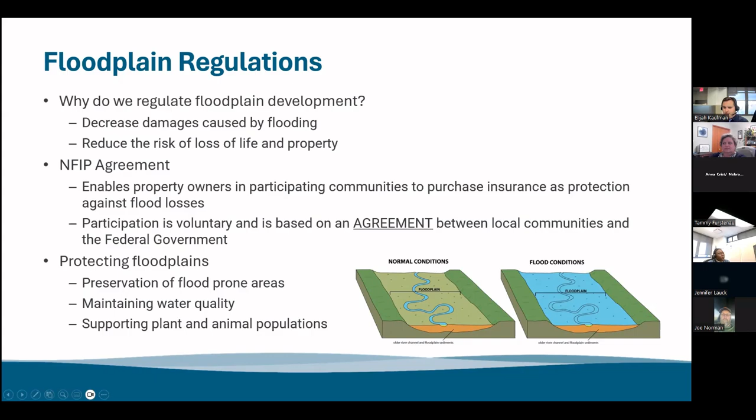There are a couple different levels to floodplain regulations. They start at the federal level with the Code of Federal Regulations, Title 44, Part 60.3. That Code of Federal Regulations sets the minimum standard for floodplain regulation across the country. At the state level, Nebraska has our own administrative code, Title 455, Chapter 1, which sets the state standards, which meet and exceed the federal level. An example of this is Nebraska has adopted a few higher standards, one being the 1 foot freeboard requirement for development within the floodplain.

The state and federal minimum standards are then enforced at the local level with the Nebraska Revised Statute, Chapter 31, Article 10. This gives participating communities the authority to enforce these regulations within their own communities. These communities are required to adopt a floodplain ordinance that meets or exceeds the federal and state minimum standards, where all these regulations are listed.

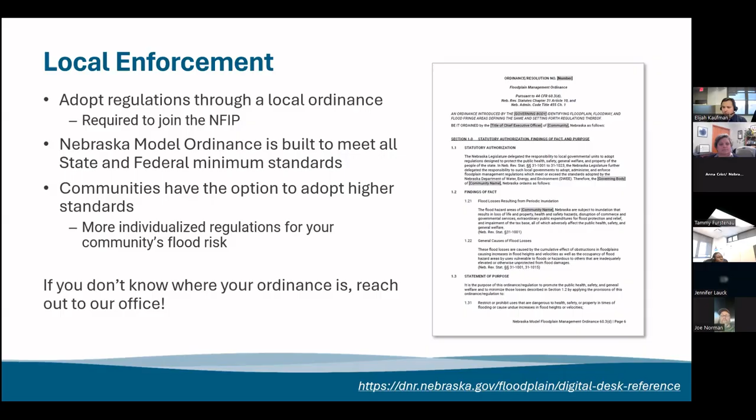Our Nebraska State Model Ordinance is specifically designed to meet all state and federal minimum standards. So if you are basing your ordinance off of our model, it should have all of the required language necessary to make it compliant for the National Flood Insurance Program. Communities then have the option to adopt higher standards, which are more individualized regulations for your community's flood risk. We'll get into that with the rest of this presentation.

So that just brings us to our higher standards. There are a ton of different kinds of higher standards that are available for communities to adopt. Our model ordinance does not include all of the options for higher standards, so this is not a comprehensive list whatsoever. But we have broken down some of the options that we have available in our model ordinance into a couple different categories.

So we have administrative higher standards. These standards establish additional administrative procedures and influence how a community processes and reviews floodplain development permit applications.

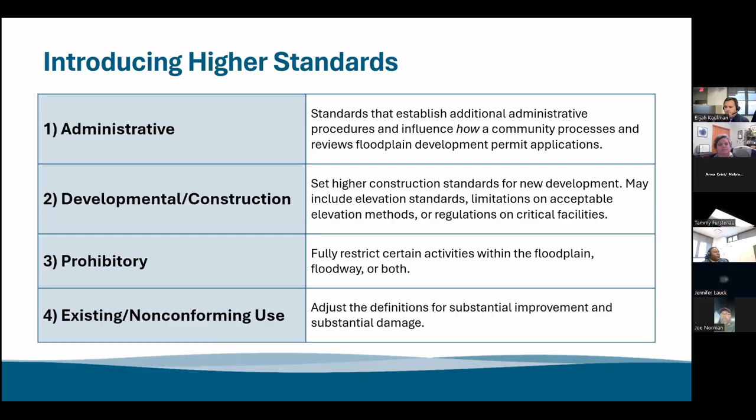So those are the four categories we're going to be covering today, but we will go ahead and get more specific with some specific standards that are available for adoption.

Starting with the administrative higher standards, the first one we'll talk about is the Certified Floodplain Manager requirement for the Floodplain Administrator. This standard requires the Floodplain Administrator to become a Certified Floodplain Manager after the start of employment. The typical language for this is they would have to get the certification within a year of starting this job. Communities can adjust that timeline as needed.

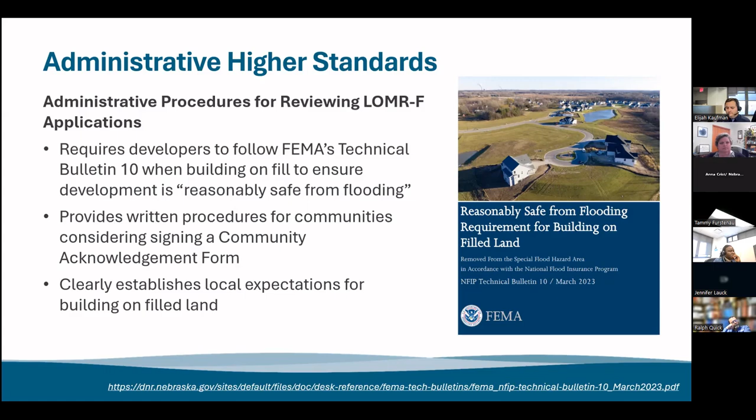So what are the benefits of this higher standard? Communities are required to sign off on any LOMR-F applications certifying these statements. So the community has to certify that they are aware that fill was placed in the special flood hazard area or your regulatory floodplain. The development has been permitted. The fill is not in the regulatory floodway. All current and future development will be reasonably safe from flooding.

So having this information in your ordinance certifies that you are following that specific procedure. The developer is following specific procedures to make sure that the development will be reasonably safe from flooding and done the correct way. So it's just creating that standard procedure in the ordinance when you're reviewing each of those statements.

The next one we'll cover is setting time limits for permit validity. Generally when a developer is doing a project within the floodplain, they have 180 days after the floodplain development permit is approved to begin work on the project. And then after that, as long as that timeline is followed, the permit will be good for the life of the project unless otherwise specified. So communities have the authority to set time limits on when a project can be completed or the lifetime of the permit after the project is done.

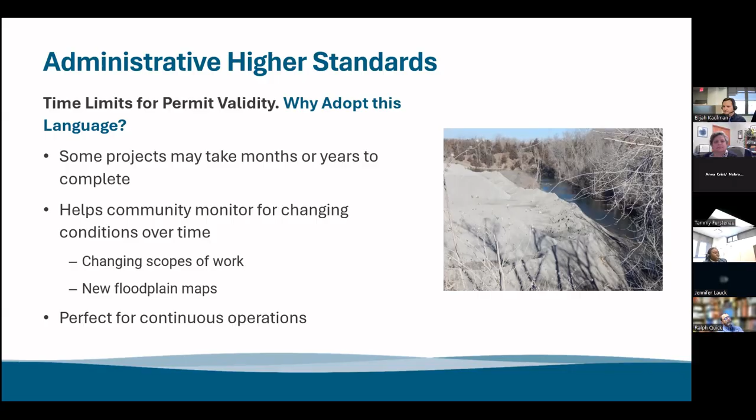So some additional benefits to adopting permit time limits: it ensures that developers are routinely aware of floodplain requirements over time, so that relationship and communication doesn't break down. Those requirements are brought to attention every so often after that permit expires, and you can assure that the activities happening in the floodplain are staying consistent with the permit's requirements.

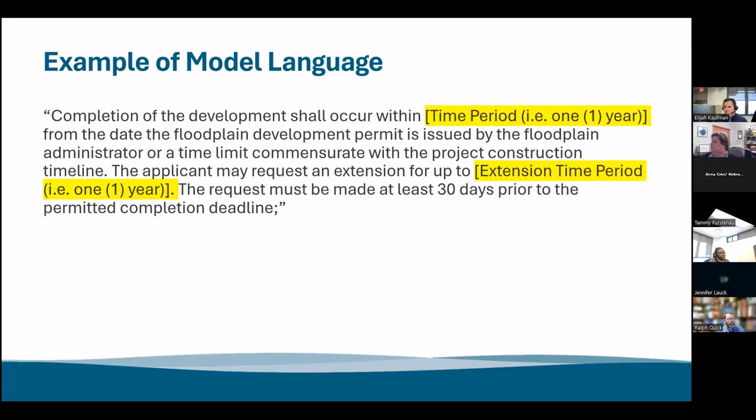So here's kind of what that model language would look like if you were to put that into your ordinance. You can see there is a time period for when development should occur, and then there's a place to apply an extension time period if necessary.

So the purpose and benefits of this: post-construction documentation is sometimes forgotten about after the permit is provided, but that's something that's necessary when we come in and do community assistance contacts and double check administrative procedures. We want to see this documentation, so making sure that you are staying on top of it and collecting all the necessary documentation. Putting a time limit on that can be beneficial to make sure it doesn't get forgotten.

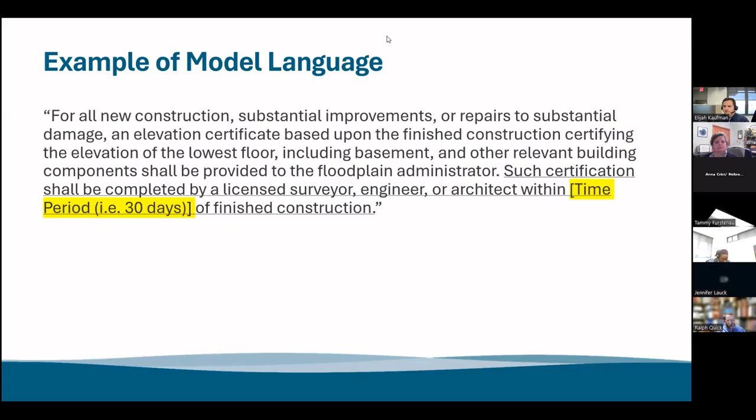Now we'll move on to some of the developmental higher standards that we have. The first one we'll talk about is the higher freeboard requirement. So first, what is freeboard? It's a factor of safety, usually expressed in feet above flood level for the purpose of floodplain management. It's meant to compensate for the many unknown factors that could contribute to flood heights greater than the height calculated for a select size of flood and floodway conditions.

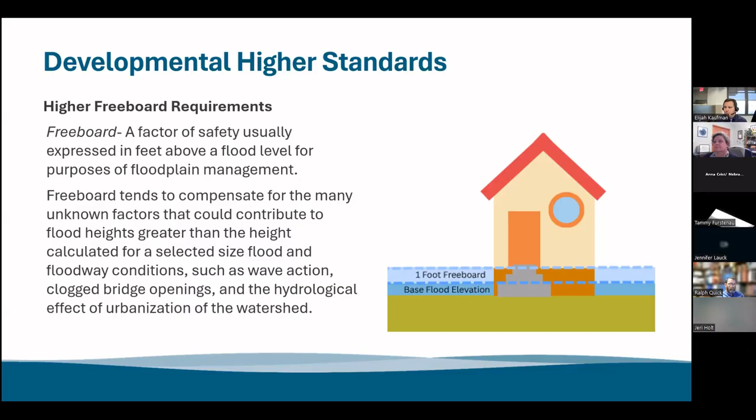In Nebraska, the state has adopted a higher minimum standard than the federal level, requiring a 1 foot freeboard statewide for all development in the floodplain. Communities can require additional freeboard of their choosing, whether an additional half foot or a full additional foot or higher, depending on whatever your flood risk is. You can make that decision as a community. But this regulation applies not only to elevating a structure, but to dry flood-proofing structures as well.

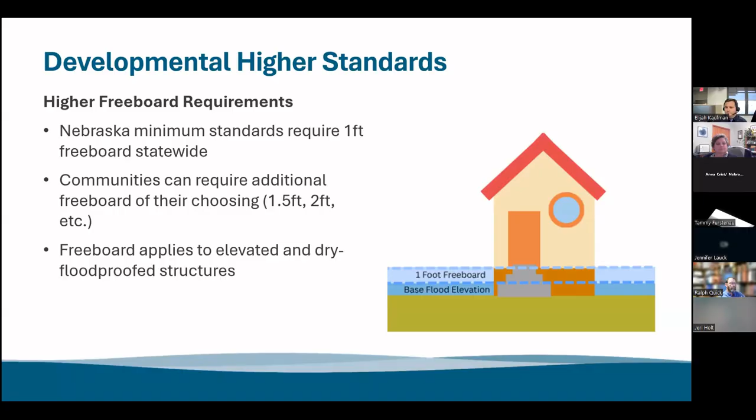So why adopt this language? It acknowledges that higher floods may occur. The regulatory floodplain is the 1% annual chance floodplain, but there are some areas that do experience higher or larger floods than that. So it's taking that into account.

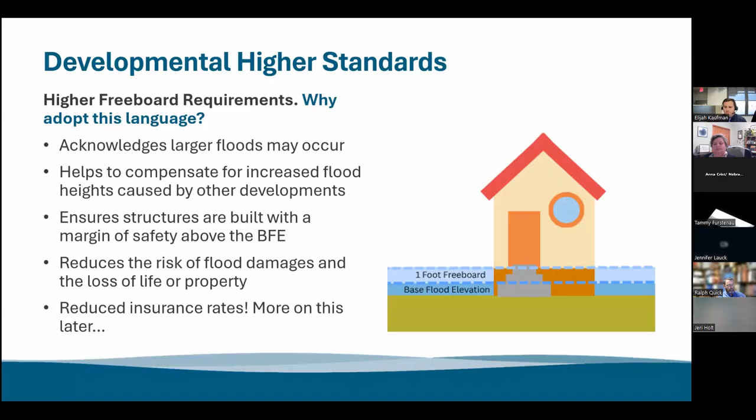It helps compensate for increased flood heights caused by other developments. It ensures that structures are built with a margin of safety above the base flood elevation, reduces the risk of flood damages and loss of life or property, and it can potentially reduce insurance rates, which we will talk about a little bit later in this presentation. There are a lot of benefits to increasing that freeboard.

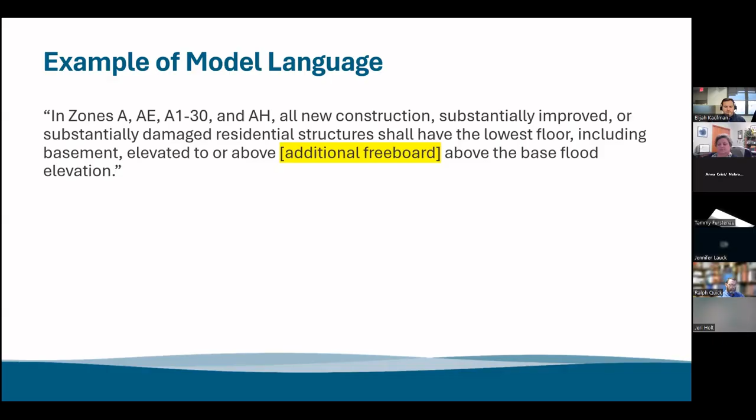And this is what that model language looks like. There are a few different places in the ordinance that state what the freeboard requirement is, whether it's related to residential structures, non-residential structures, or manufactured homes. You would just plug in whatever your freeboard requirement is into those different spots.

The next developmental standard is elevating or flood-proofing HVAC or mechanical equipment. Elevating this type of equipment to the lowest floor level is a pretty common practice, but it's not required by state or federal minimum standards. So putting this requirement into your ordinance will require new construction to elevate or flood-proof this equipment, reducing the risk of property damage and loss of services to that structure. Again, this is another higher standard that could help reduce flood insurance costs for the development.

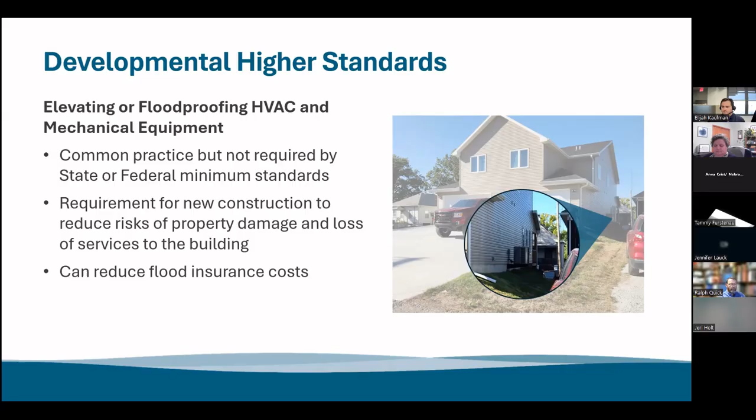Moving on, we have regulating critical facilities. This higher standard establishes specific regulations for facilities considered critical to the continuous operation of the community in times of disaster. This includes hospitals, first responder facilities like fire departments, retirement homes, facilities that store hazardous materials, and other community lifelines essential for the function of the community.

This language regulates these types of facilities vertically, as in adding additional freeboard requirements, and horizontally. So it not only applies to the 1% annual chance floodplain, or the regulatory floodplain, but also applies to the 0.2% annual chance floodplain. On this image, you can see the regulatory floodplain shown in blue, and the 0.2% annual chance floodplain shown in that yellowy orangish color. So these requirements would extend out to the orange shaded area.

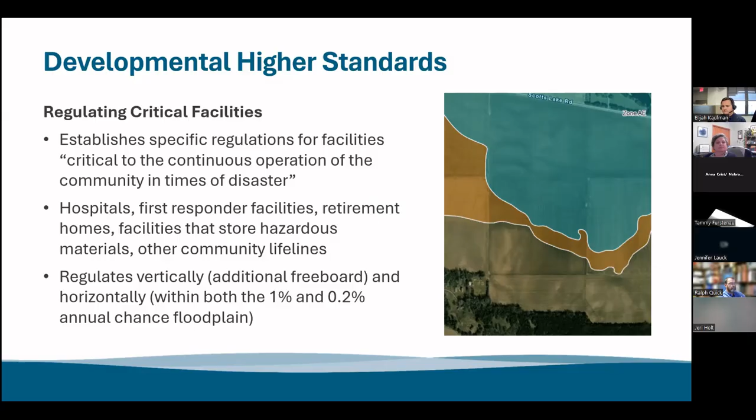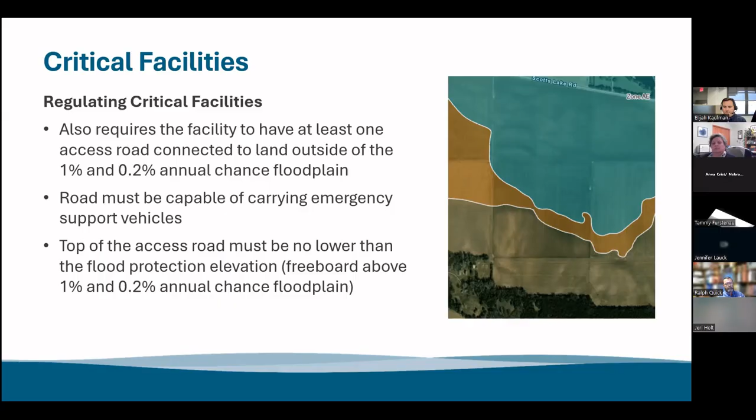These requirements also require the facility to have at least one access road connected to land outside of the 1% and 0.2% annual chance floodplain. These roads must be capable of carrying emergency support vehicles, and the top of the access road must be no lower than the flood protection elevation, that's the freeboard above the 1% and 0.2% annual chance floodplain. This ensures there are safe roads outside of the floodplain so people can evacuate or emergency vehicles can be mobilized.

So why are these regulations important? They ensure higher development standards for hospitals, first responder facilities, and retirement homes so that they are not affected in times of flood or large disastrous flood events. They keep the community functional during and after a flood event, and increase community resiliency, so critical facilities are not damaged during flood events and it's easier for the community to bounce back. When a larger flood occurs, we want to make sure that the facilities that need to respond can respond—you don't want your first responders to be stuck in a flood when they could be helping the rest of the community.

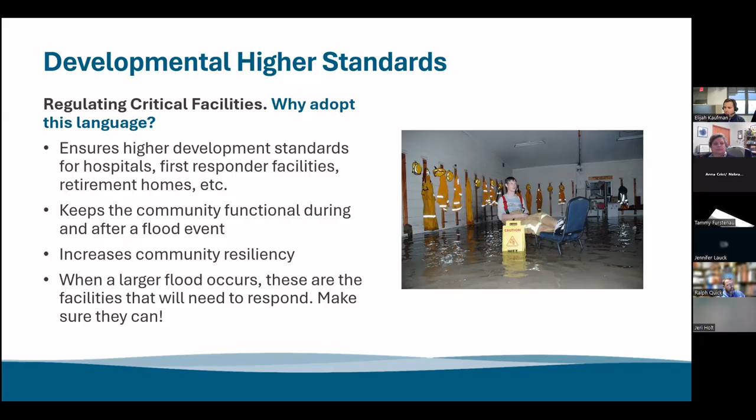The next developmental higher standard is setbacks. This is a relatively new higher standard that we've included in our new model ordinance. It's the expansion of a regulated area under the floodplain ordinance, requiring developments to be located a set distance away from a watercourse, floodplain, or floodway boundary.

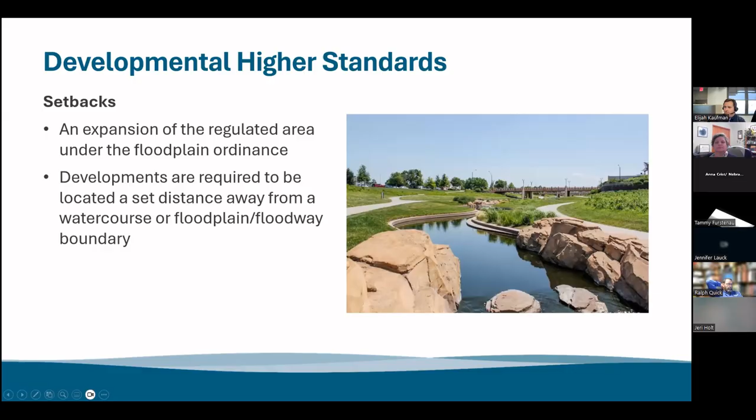With this language, communities can customize it a bit. You can choose which watercourses the setbacks will apply to, where the setback will be measured from—whether from the floodway boundary, the top of a channel bank, or the center line of a watercourse—how large the setback area will be, and the different types of development that will be prohibited in the setback area.

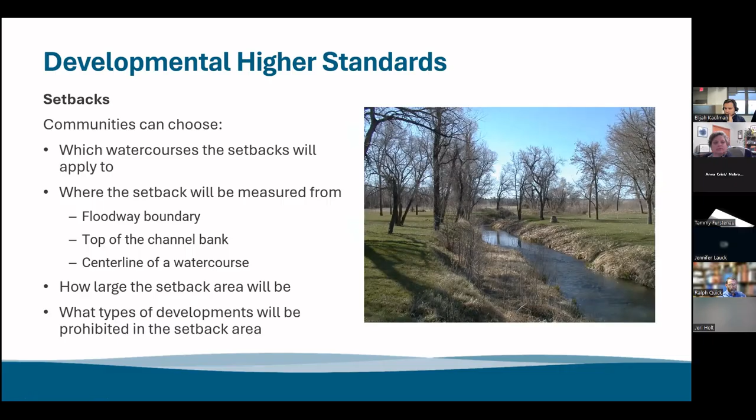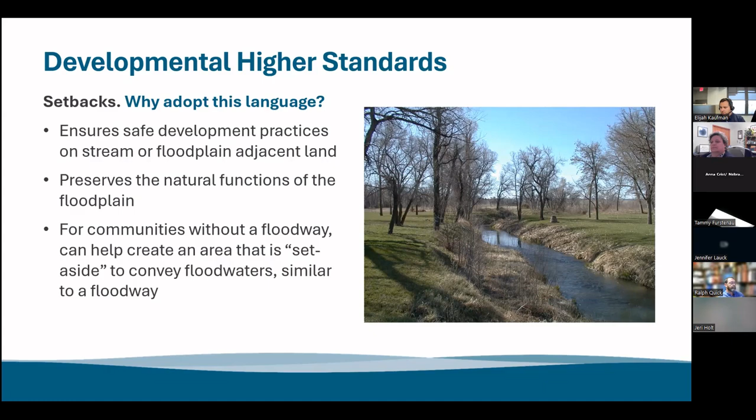This is meant to ensure safe development practices on stream or floodplain adjacent land, but the biggest benefit is preserving the natural functions of the floodplain. By keeping this area free of development, it allows the floodplain to function as it should, allowing water to flow away from development in the area. For communities that don't have a designated floodway area, it can help create an area set aside to convey floodwaters, acting similar to a floodway boundary.

These next few developmental standards are in a subcategory of their own, all related to enclosures below the lowest floor. The first deals with non-conversion agreements. Per state and federal minimum standards, enclosures below the lowest floor can only be used for limited storage, parking, or access to the upper floors.

Communities can require a signed non-conversion agreement between the community and property owner to better ensure these areas are not converted post-construction. It can be difficult to make sure the use of these areas stays consistent with what is supported by the permit. Having this non-conversion agreement helps set that requirement and expectation.

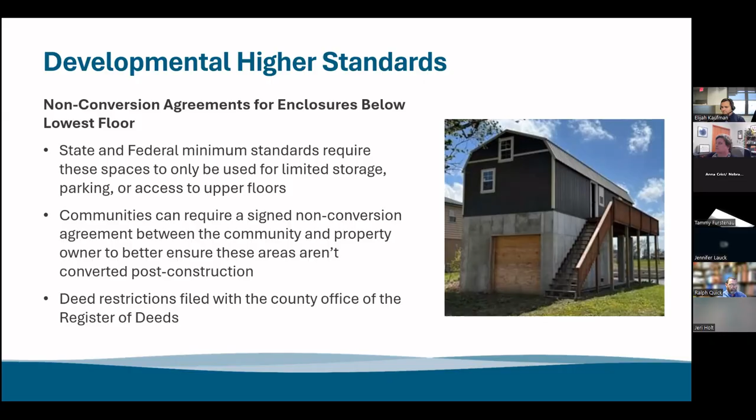You can file these deed restrictions with the county office of the Register of Deeds, so if there's any transfer of ownership, that requirement gets passed on. This ensures the expectation is clearly communicated and codified during any transfers of ownership, and provides legal backing for enforcement—it's just putting that language in your ordinance to help back you up if you need to use it.

This is an example of what a non-conversion agreement would look like. We have a few templates available if you're ever interested or need one. It's an agreement between the property owner and the community setting the expectations for the use of the structure, and it may allow for inspections, which are used to ensure the use of the structure is still compliant with the permit.

We have three different types, and the biggest difference between them is the inspection language. Type A requires an annual inspection. Type B sets the standard that the community has the right to inspect at any time. Type C does not mention inspections at all. Depending on the type of development, you could use either type, whichever works best for the circumstance. These are just templates, so if you need to add or alter any language, we recommend talking to your local legal counsel—you can also talk to us for recommendations.

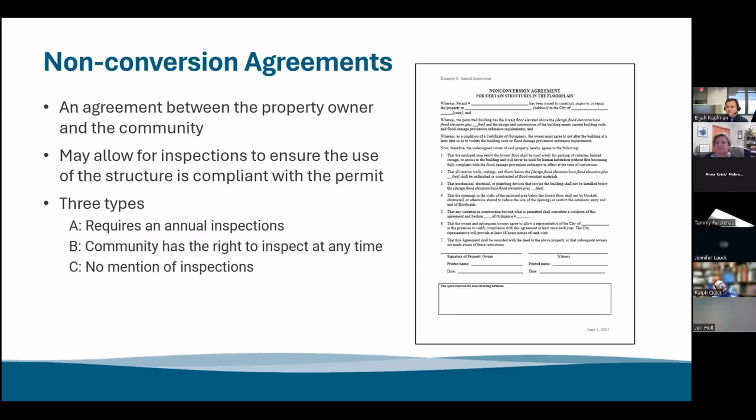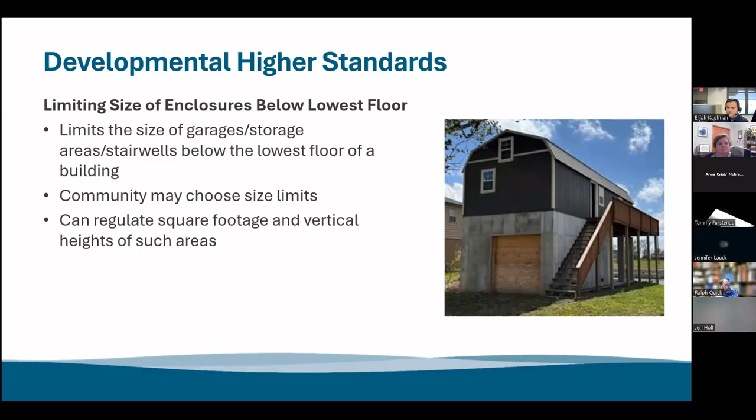The next regulation dealing with enclosures below the lowest floor is limiting the size. This language limits the size of garages, storage areas, or stairwells below the lowest floor of the building. It does not require size limits on crawl spaces with heights lower than 5 feet below the top of the next highest floor, so keep that in mind. The community may choose to set the size limits—the model language has a recommended limit, but it's up to the community's discretion, and you can regulate the square footage of the structure vertically, or both horizontally and vertically.

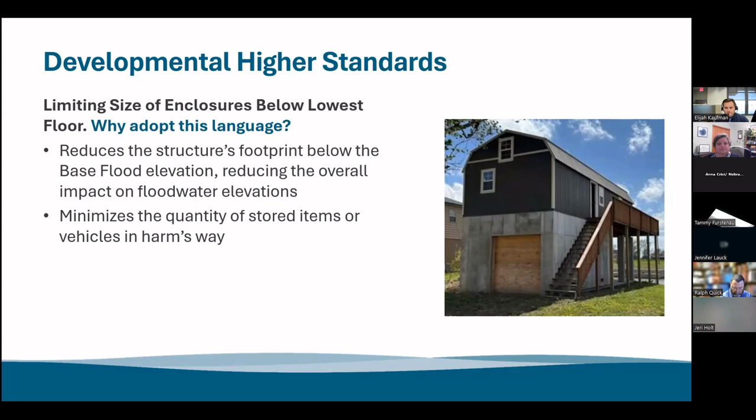Benefits of this are reducing the structure's footprint below the base flood elevation and reducing the overall impact on floodwater elevations. It also minimizes the quantity of stored items or vehicles in harm's way. Remember, enclosures below the lowest floor typically have that wet floodproofing requirement, so water is meant to flow through these areas freely. You don't want people storing a ton of belongings or highly expensive items here that could be subject to flood damage.

Next, we just listed out some of the prohibitory higher standards. There's not a whole lot of detail we've put into this, as they are just meant to fully prohibit these types of developments.

Communities have the option to prohibit all development within the floodway, prohibit manufactured homes in the floodplain, prohibit recreational vehicles in floodways or floodplains, prohibit new or replacement on-site waste disposal systems, prohibit the use of fill, prohibit dry floodproofing for non-residential structures, or prohibit enclosures below the lowest floor.

Now, when you're considering these options, look at some of your other ordinances that your community may have. If your community already prohibits manufactured homes within your jurisdiction, prohibiting manufactured homes within the floodplain would be a good option to include in your floodplain ordinance, just to stay consistent.

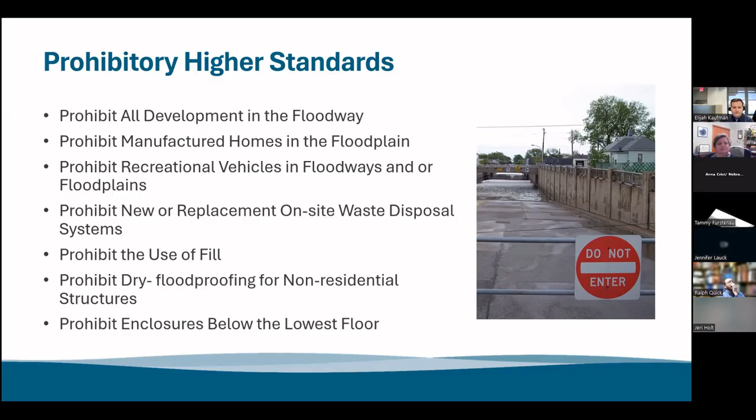And then we'll move on to the regulations that apply to existing and non-conforming use higher standards.

The first one we'll talk about is lowering the substantial damage, substantial improvement threshold. The state and federal minimum regulation for substantial damage and substantial improvement is the 50% threshold. So the cost of repairs or improvement that are 50% or more of a structure's market value then fall into that substantial damage, substantial improvement definition.

Communities can choose to lower that percentage threshold for what is considered new construction. Additionally, you can also implement cumulative tracking—tracking the cost of repairs and/or improvements over a set period of time, whether that be a year, 5 years, or 10 years. Keeping track of that would then need additional administrative procedures to make sure that tracking is done correctly.

So the purpose of lowering the threshold is to further help reduce the number of non-conforming or at-risk structures in the floodplain over time by making sure these structures are mitigated and protected from flooding. Your community may have lower thresholds for grandfathered or non-conforming use structures or conditions in other ordinances, so again, stay consistent across the board with that.

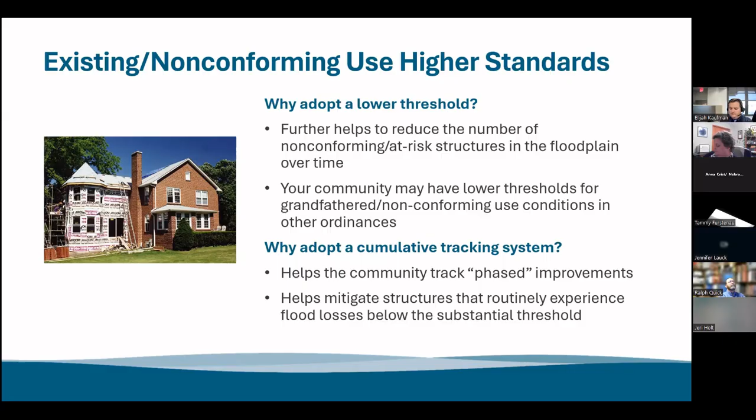And it helps mitigate structures that routinely experience flood loss below the substantial damage threshold. So instead of continuously experiencing flood damages, once they reach that threshold within a certain time, they can be brought into compliance with your ordinance and protected from flooding.

The next one is including the definition for repetitive loss with your substantial damage definition. Repetitive loss structures are those that have a history of being damaged by flooding. The definition for repetitive loss that is put into your community ordinance may be different than the insurance definition.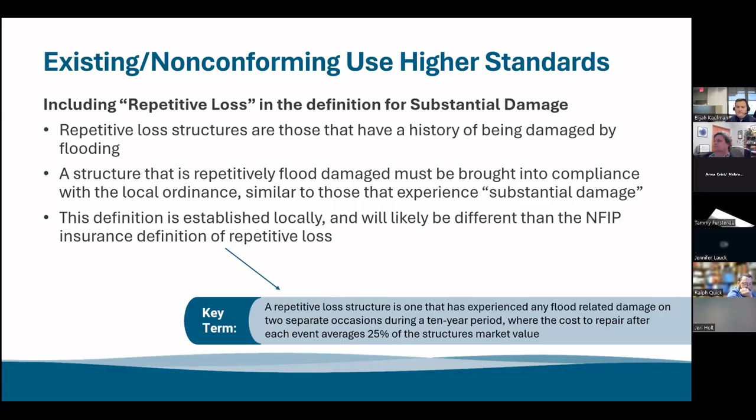The general definition is a repetitive loss structure is one that has experienced any flood-related damage on 2 separate occasions during a 10-year period, where the cost of repair after each event averages 25% of the structure's market value. So again, the community definition may be a little different, but with this, a structure that has experienced repetitive flood damage would then be brought into compliance when it meets that substantial damage threshold.

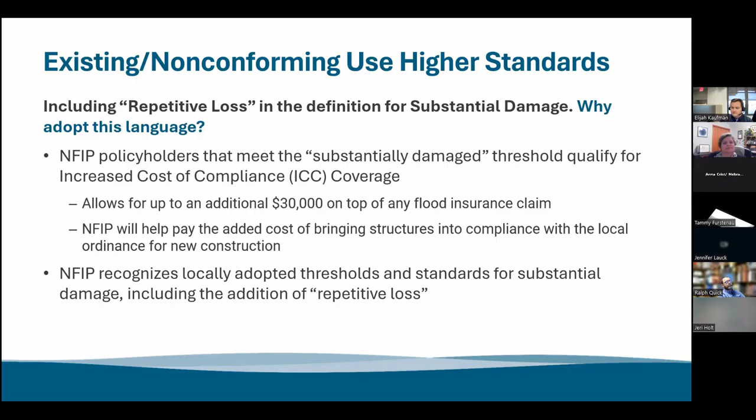Benefits of this: NFIP policyholders that meet the substantially damaged threshold qualify for increased cost of compliance coverage. This allows for an additional $30,000 on top of any flood insurance claim, and the NFIP will help pay the added cost of bringing the structures into compliance with local floodplain ordinances for new construction. So adding that repetitive loss definition then opens up that increased cost of compliance coverage for those types of structures.

I'll go through this a little bit quickly as we're running short on time, and we do have a recorded video about this already on our website. Our new model ordinance does have a guide to optional or higher standards at the very end of the ordinance.

With our old model, the optional language was just fit within the ordinance itself. With all this being at the end now, it just allows for more room to provide descriptions on the higher standards, provide instructions on how to use it, and offers that plug and play functionality. So it'll tell you exactly where it will go in your model ordinance and how to use it.

And then we also have little descriptions for community rating system class prerequisites as well, for each of the standards that apply.

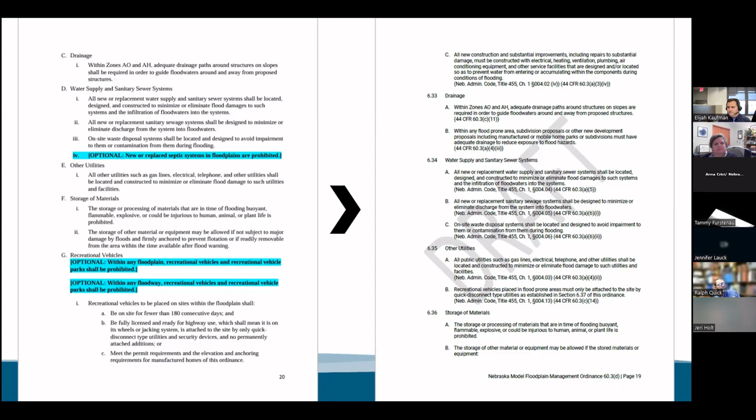So again, this is just how it looked in our current model ordinance versus our new model ordinance. It's a little bit less clunky, more organized, and easier to use with all of the optional language at the end.

And this is how it looks on our guide. We have the descriptions for the optional standard. So if you are working with your governing body or your board and you're trying to describe why these standards are necessary or beneficial, there is a brief description in this document for you to use for that.

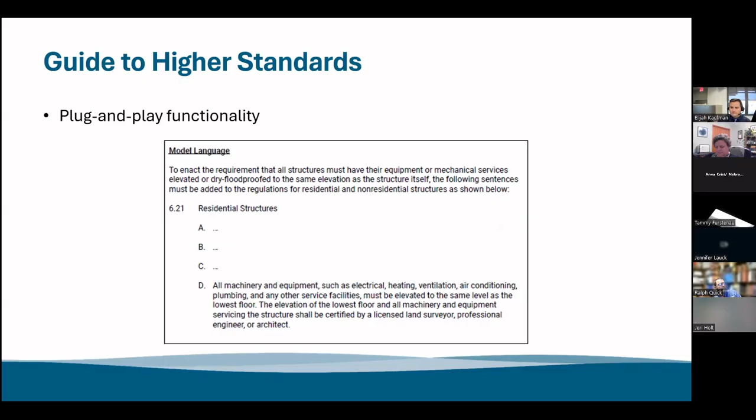Again, the plug and play functionality, there are boxes that show exactly where the new language should be placed within your ordinance. And then for the specific standards that apply, there's the additional note for the CRS prerequisites.

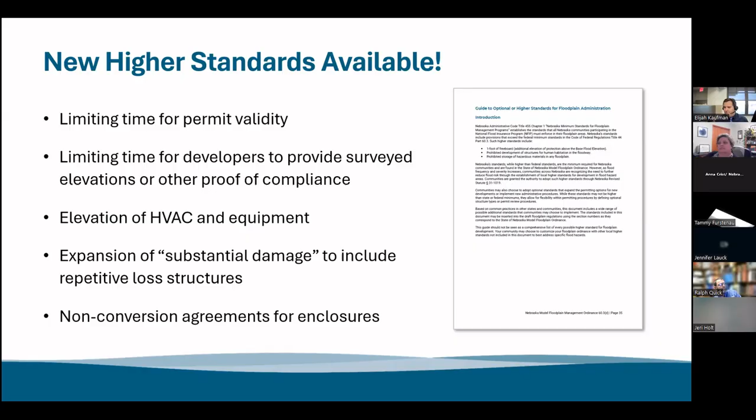And then this new guide does include some new standards that weren't available in our current model. So that includes the limiting timelines for permit validity, timelines for proof of compliance, the elevation of HVAC and mechanical equipment, the expansion of substantial damage to include repetitive loss, non-conversion agreements for enclosures below the lowest floor, and now setbacks as well.

All right, so we'll just go through some of the general benefits for adopting higher standards. Local enforcement authority means that the communities can adopt higher floodplain standards that exceed state or federal minimum standards. These higher standards can better protect from flood risk by reducing the loss of life and property, reduce the risk of damages due to flooding, and generally encourage proactive development, so protecting these structures before flooding occurs instead of reacting after a flood event happens.

So these higher standards increase the safety of community members, reduce the effects of development on the floodplain, maintain the floodplain's natural functions, reduce financial and structural damages for property owners, encourage faster recovery after a disaster, and have the potential to lower flood insurance premiums.

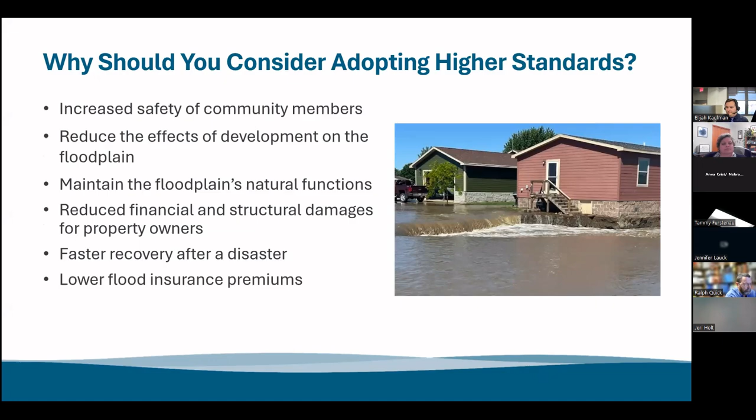So just some general statistics that can help you support adopting higher floodplain standards. One foot of freeboard generally only adds 0.25% to 1.5% to a total construction cost for a new building. So the cost for additional freeboard will pay for itself within the first 5 to 10 years of a structure's lifetime through reduced damages and insurance costs.

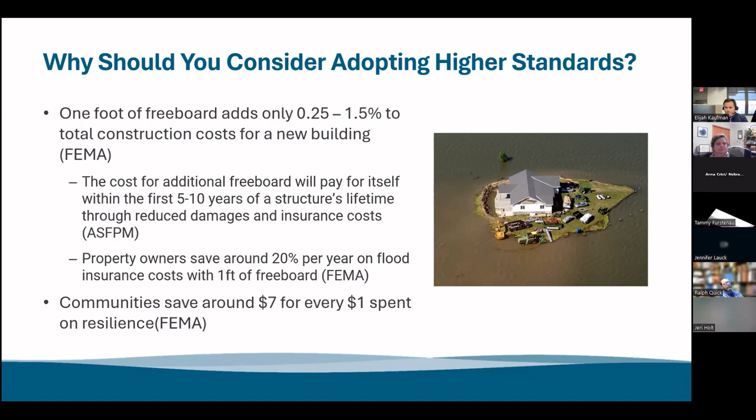And property owners save around 20% per year on flood insurance costs with 1 foot of freeboard. Communities that spend $1 on community resilience typically save around $7. So there's a benefit in spending the extra time to build safer from flooding at the start versus repairing damages later on.

And then for our community rating system communities, so for those of you who don't know, the community rating system is a voluntary program that NFIP participating communities can opt into for discounted insurance rates. These communities adopt higher standards that earn the community credits to raise their class rating or to get a better rating. So these class ratings determine how much of a discount communities receive on flood insurance. So by adopting more higher standards, you earn more credit, you get a higher discount on your insurance premiums.

An example of this is with the freeboard requirement. For having a 1 foot freeboard, which is again a Nebraska state standard, a community can earn 100 CRS points for CRS credits. For having a 2 foot freeboard, the community can get 225 points, and a 3 foot freeboard can get a community 375 points. So there are some benefits if you are a CRS participating community.

Some real life examples across the state. Communities with a higher freeboard include Cass County, Douglas County, the city of Rulo, the city of Lincoln. The city of Wahoo requires backflow protection for new subdivisions to prevent sewage backups. And then Bennett and Scottsbluff both prohibit all types of development in the floodway.

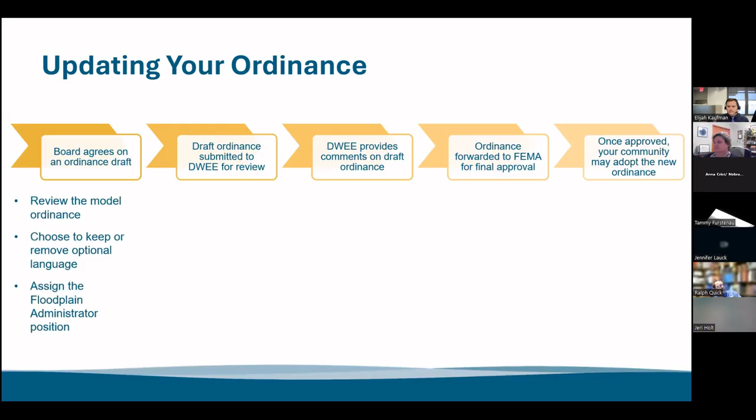So we'll go through this pretty quickly, as this is in a lot of our other trainings, but the process of updating your ordinance: you would first go to your board, review the model ordinance, and choose to keep or remove any optional language. This would include your higher standards, and assign the floodplain administrator position.

Once the draft is done, you would submit it to our office here at the state for a review and a cross-check to make sure all of the standards are met. We will provide comments on anything that's missing or incorrect. So if any of the higher standards are put in incorrectly or used incorrectly, we'll let you know, and then it's the community's responsibility to make those changes.

Once we have approved a draft, we will send it over to FEMA for final approval. If they have any comments, they will return it to us and we will help you fix those. Once that is approved, we will return that draft copy to the community for final adoption, and then you would just send a final signed and stamped copy of that ordinance back to us.

So some tips for enforcing higher standards. It's important when you're considering higher standards to consider your community's flood risks and needs. Some of these higher standards may not be applicable for or reasonably enforceable in your community, so only consider higher standards if you're committed to enforcing them. Make sure you're considering historical flooding and new development when you're going through these higher standards.

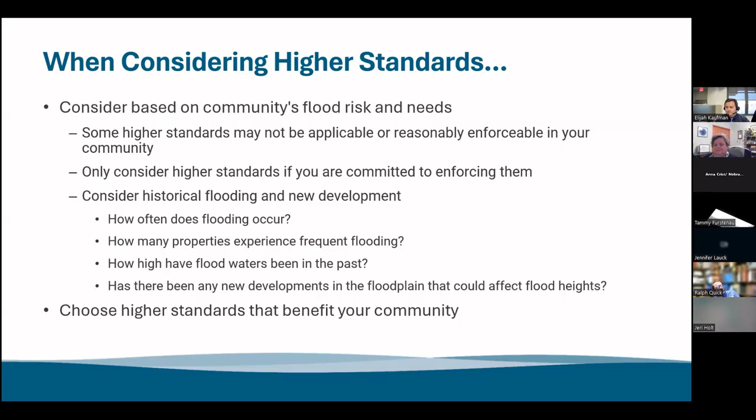It's important to have a plan to address existing structures. So when new standards are adopted, existing structures can typically remain as is unless it becomes substantially damaged or improved, in which case it needs to be brought into compliance with the new ordinance. And then have a plan for informing community members about the higher standards that were adopted, so they should be published or shared on a community website, in a newspaper, office buildings, or at public meetings.

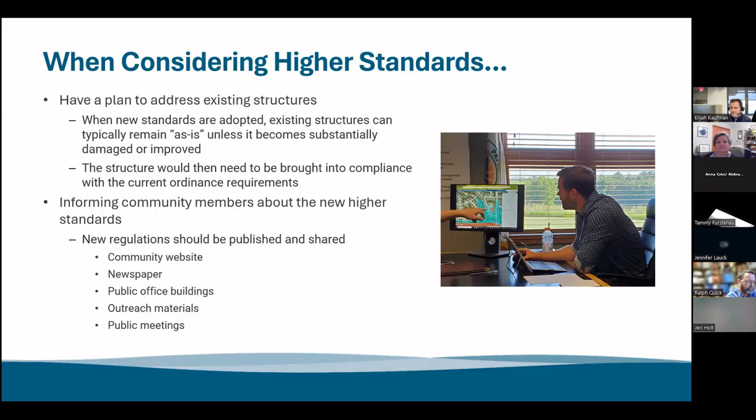Things that can help you enforce these standards include sharing outreach materials with the public, educating your community members on the local flood risks, and reaching out to property owners that could benefit from these higher standards. Use your ordinance to your advantage, since it contains all of your enforcement authority and the required language for these regulation standards, so use that to back up your stance.

Work with your governing body, and again, ask us, our Nebraska Floodplain Management team, for help. We are available to speak with community officials or attend community meetings to help answer questions. All you have to do is reach out to us and ask. And again, all ordinance updates must be reviewed by our office prior to adoption, so we can help you adopt those higher standards as needed.

For the education aspect, we do have a few promotional materials available to communities on our website. We have a floodplain management higher standards brochure that we created that is available for use. We post informational posts on our social media that you can share on websites or your own social media, and then just post information in high traffic areas. You can send out mailers as well.